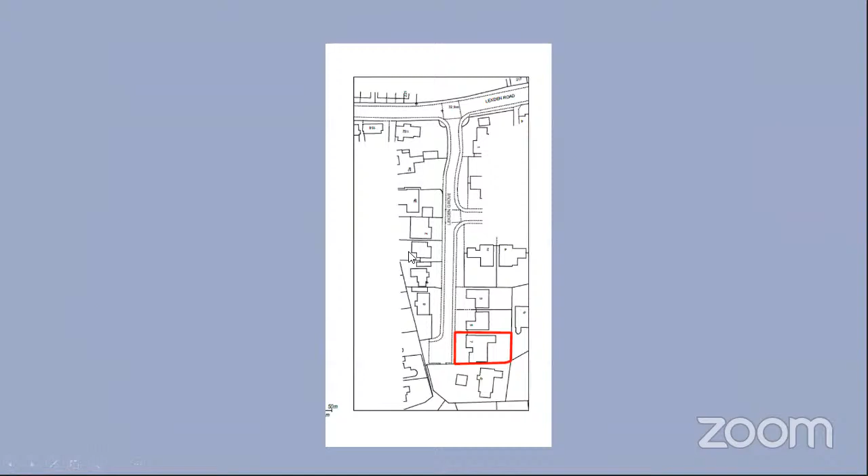Thank you, Chairman. Can you all hear me? Yes. Good. Okay, I'll share the presentation. Just bear with me. Sorry, Chairman, it's not letting me share. Chris, would you like me to share it and you just talk to it? Yes, if you can do. It's not sharing the right screen for me. Is it showing now? Yes. If you could just enlarge it, please. Is that okay?

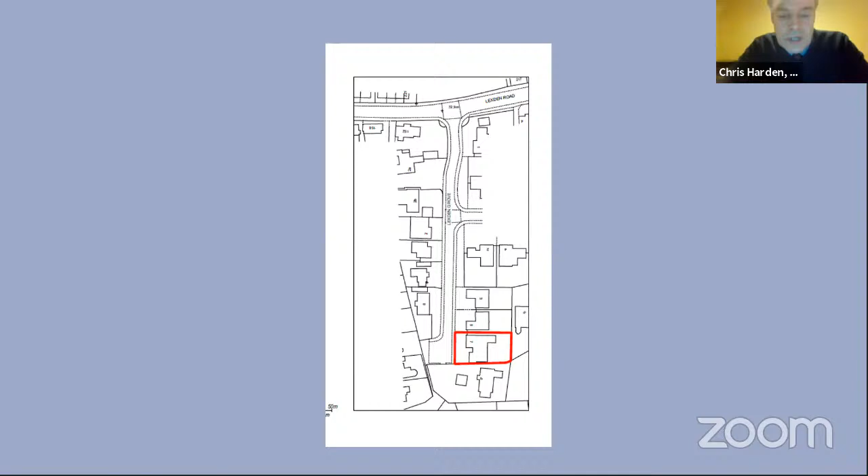Yes, that's fine. Okay, so could you just go back to the description, please, and I'll tell you when to move on. So it's a two-story front and rear extension. There's an increased width of the box dormer, and there's also a porch. Next slide, please. This shows the application site in red there, and the property is situated roughly centrally within the plot, although there's obviously a larger rear garden. Note all the other properties to the rear and next to it. Next, please.

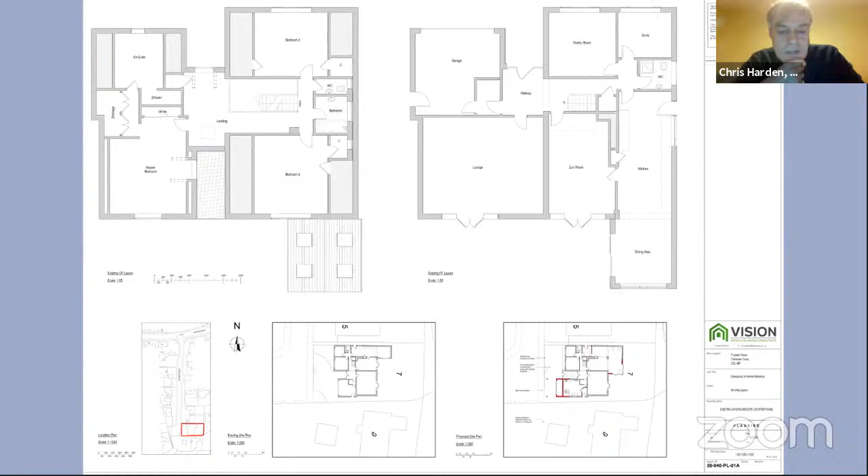Hopefully you can see that. This shows basically at the top the existing proposal, and I've got some larger slides that will come up, but essentially there is a front extension. You may just be able to make it out in red at the bottom of the screen, but we'll go to the next slide and there should be some clearer. That's right. So basically at the top is the front of the property, and the bottom of the screen is the rear of the property. So at the front, you've got this front extension coming out where the existing garage is. I'll show you some photographs in a minute. That's been reduced from the initial submission, as outlined in the committee report, and the stilted arrangement that was in the original application has also been omitted. So I'll show you the elevations in a second, but that's the revision in that respect.

And then the rear elevation, the element in red at the bottom of the screen to the right is the first floor extension going over an existing single story extension. And to the bottom left, you can see two little red lines. That's the additional single story element. So not much single story addition at the rear, and to the rear right, the first floor extension. Next slide, please. This essentially is a closer view of the site. You see the boundary to the right is the rear boundary, and you'll see that that's the distance that the proposal would be from the rear boundary. Next, please.

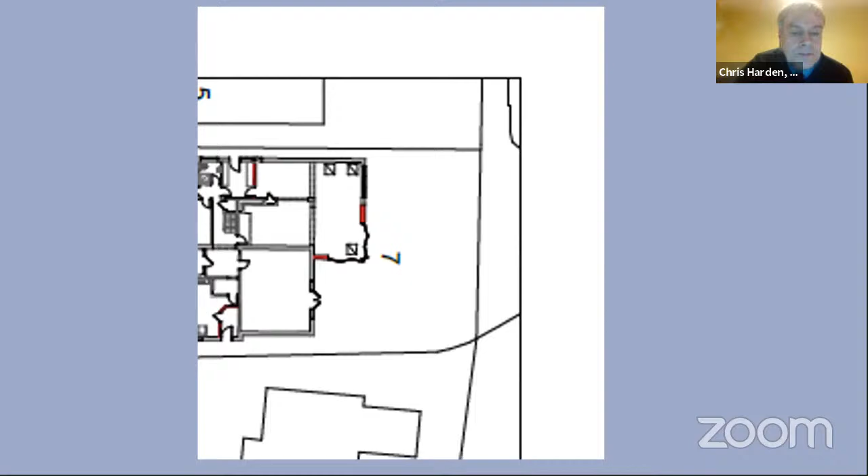If you can just scroll down a little bit on that. Okay, no, you can't. Okay, so basically, if you look at the bottom of the screen, to the right shows the extension coming out at the front, on the front elevation. Then the bottom far right drawing shows the extension to the rear, which is to the rear right. It's a shame I can't use my pointer. I presume you can't see my pointer. The element to the rear right is the first floor extension, and you'll see the bifold doors. That's the extra single story extension.

The drawings at the top of this screen show the existing dwelling as it is. So if you look at the middle one, you'll see that existing single story element to the rear there. That's where the extension at the rear is going to be positioned. So if you can just go, it's not very good light for me here.

Now if you look to the second, that's right, just to the right of your cursor, you'll see that element to the rear of that extension. That is where the first floor extension is going to go. So that's to the right-hand side. You'll be able to compare the drawings with the drawing above. So that's right, that's the element there that's being positioned.

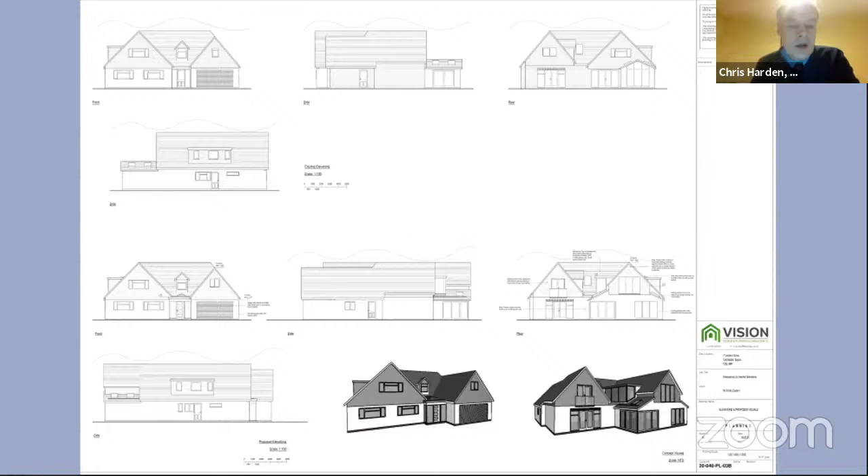So front and rear extension, you'll note there's a little dormer. If you look at the rear elevation, there's a dormer within the building being extended out. That's the area where we want that to be obscure glazed so it doesn't look sideways, basically. If you just go to the next slide, please. You can come back to those drawings if you need to.

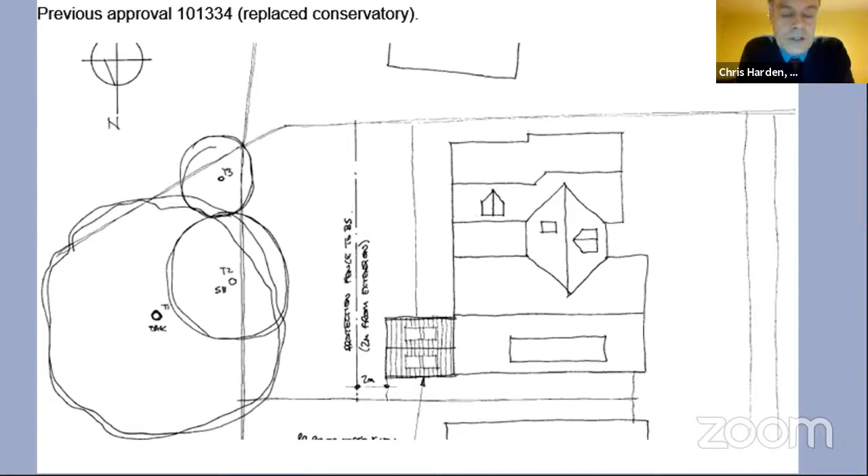Again, I can't verify the accuracy of this, but it does seem quite accurate to me. So if you can just go back one and then forward one. So that shows the element that is proposed to be added. Next photograph, please. This is just some previous planning history. You'll note the previous application in 2010 showed an addition to the rear there. That's that single-storey element. That replaced the conservatory. Next, please.

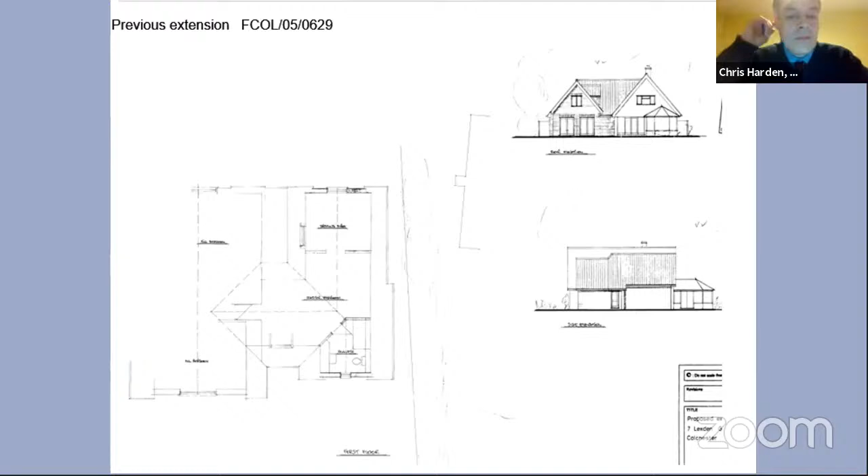And finally, in terms of the history, this basically shows what was added previously on the other side by the garage. Essentially, it was an extension, if you look at the property from the front to the right, covering some of the original garage and making a 1.5-storey element there. So to the right of the property, as you look at it from the front, there was that 1.5-storey extension in 2005. I think that's the last of the slides. If you can just check what the next one is, please.

No, that's it. So if you just go back to a rear view of the property, please, in photograph form, and I'll carry on with my presentation. Keep going back, yep. Back more. Okay, leave that one there, please. If you could leave that one you had there, please. Thanks. Okay. So I'll go through the planning considerations now.

So in terms of the principle of the application, the property lies within the settlement limits of the borough, so the proposal should be judged on its planning merits. In terms of design, scale and form, the proposal is considered acceptable. The front element has been reduced, and now it is in keeping with the character of the existing property. It is not a very forward projecting element, only projects about 3.8 metres. It still reads as being recessive to the original dwelling.

It allows enough car parking to be retained in the front of the site, so there'll be 2 spaces retained. So it's not considered that element will have any real detrimental impact upon the character of the street scene. It does blend in nicely with the existing dwelling. So we're now happy with that revision to the scheme.

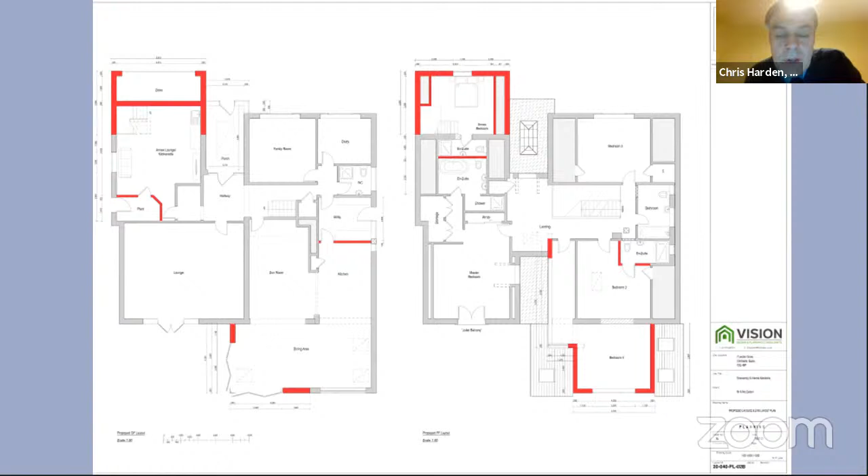Yes, sorry, Chairman, I wasn't trying to make hard work of it. All I was asking was, is there enough amenity space for a 5-bed and enough parking for a 5-bed? Because there are 5 bedrooms, whether they use them or not. Well, Chairman, as I said, it doesn't make a difference in terms of the standards. They are still the same for 4 to 5 bedrooms. So it exceeds the standards in terms of amenity space by some 60 square meters. And it doesn't make a difference in terms of parking standards. So whether it's deemed a child's bedroom, an ensuite, etc., it doesn't make any difference. Thank you very much.

Thank you, Chris. Could we leave the shared screen, please? Thank you. In the light of the committee's reservations, I would like to seek Simon's advice on whether a deferral would be a practical way forward on this one. Simon, would you care to talk to us about that?

Yes, thank you, Chair. I can appreciate members' concerns. I can appreciate that there is a perception of an overbearing relationship with the neighbouring properties, and a perception of overlooking, given the very large window on that rear gable. What you could do, you could request that officers go away and negotiate a revision to the scheme to either reduce the size and or introduce some obscure glazing on that window. Alternatively, I note Councillor Davidson's suggestion that a handed scheme be investigated. We can do all of those things if members wish it to be so.

We're obviously happy to undertake further negotiations on the scheme. I can understand the arguments around the perception of overlooking. I can appreciate the members' and neighbours' concerns in that regard, regardless really whether it breaches our policy, given that it's sort of 24 feet from the rear boundary and a very substantial window. We could negotiate changes to the scheme to try and mitigate those concerns on your behalf. So if you would like to move a deferral, we can go back and negotiate on that, and you can decide whether you wish it to come back for further consideration by this committee, Chair.